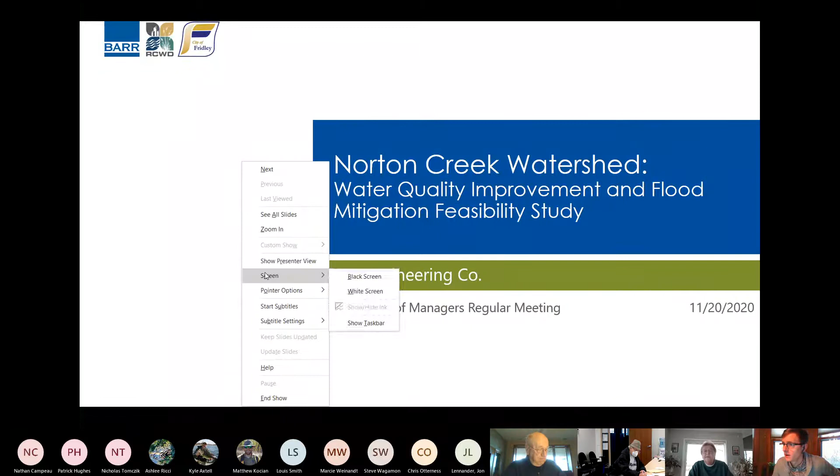Again, just to reintroduce myself, my name is Michael McKinney. I'm with Barr Engineering Company, and today I'm presenting the findings from the Norton Creek Watershed Feasibility Study. This was a study that we completed with the City of Fridley here in 2020. One of the main reasons we're presenting it here at the board meeting today is that this project was partially funded by a Rice Creek Watershed District grant that was awarded to the City of Fridley. So before I jump in, I just wanted to take a moment to say a big thank you to the Board of Managers and to Rice Creek Watershed District for taking interest in this project and for participation throughout, and for helping get this project complete.

With that, I'll see if I can turn on my laser pointer here. So Norton Creek Watershed is shown here on the figure to the left. You can see the watershed is nearly 1,000 acres, spanning portions of the city of Fridley, the city of Spring Lake Park, and city of Mounds View. Norton Creek itself is located in the southwest portion of the sub-watershed.

This is the only open portion of the creek that remains. Just to provide some context, we've got Highway 65 along the west-hand side of the watershed, and we've got Old Central going through the center of the watershed area. Norton Creek kind of goes back into a storm sewer here. It goes underneath the Medtronic parking lot, if you're familiar with where that facility is, and then it dumps straight down here into Rice Creek and drains out from there.

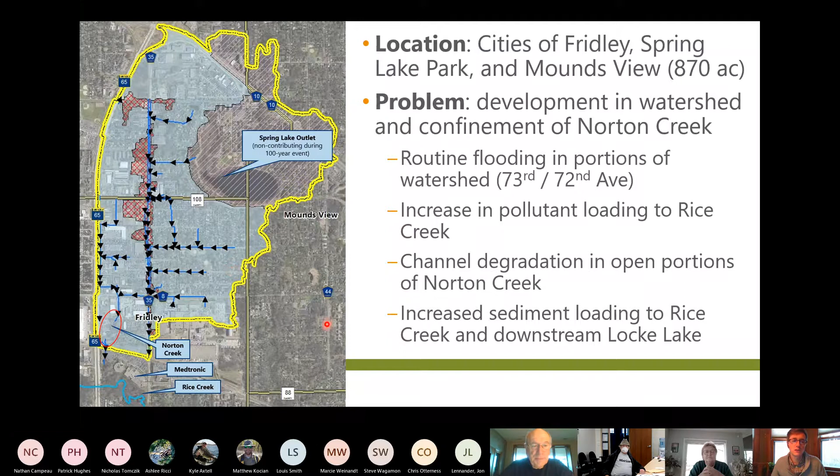So as you can imagine, with this amount of development and with confining the creek into a storm sewer system, we end up having a lot of flooding issues that occur, in particular along this former corridor of Norton Creek that we refer to throughout the report and this presentation as the focus area. That was one reason this area was initially of interest to the city of Fridley, to try and develop some flood mitigation opportunities for this area. But with this amount of development that's occurred, we're also generating higher runoff rates to the channel, which is causing channel degradation. And we're generating more suspended sediment loading and associated pollutant loading that's all getting discharged to Rice Creek. So this watershed is really of interest both from a flood mitigation and a water quality perspective.

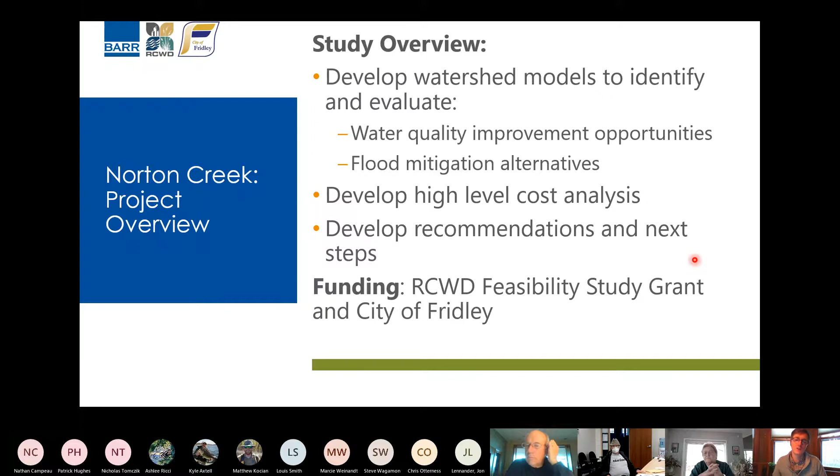So we've kind of got the overview for this study listed here. The major goal of this study was to develop models of the watershed to evaluate water quality improvement opportunities and flood mitigation alternatives within the watershed. We also developed high-level cost estimates for each one of those opportunities, and we developed a list of recommendations and next steps, both for the city and for partnering organizations such as Rice Creek Watershed District to consider.

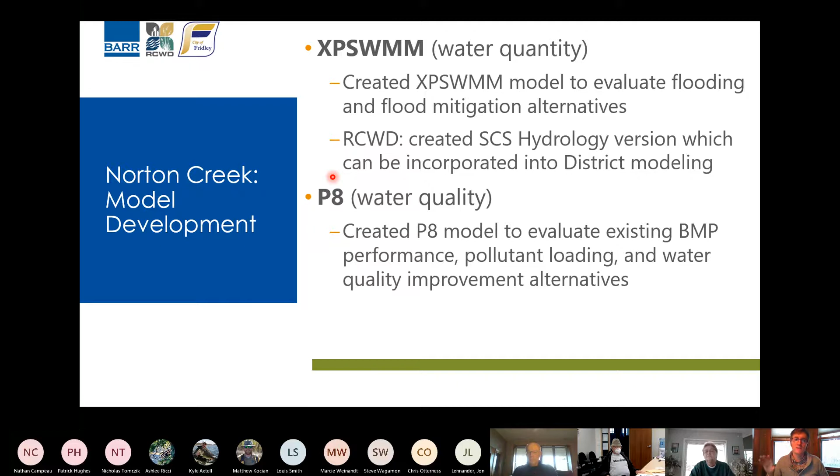We developed an XPSWMM model of the watershed area to evaluate flood mitigation opportunities, and we developed a P8 water quality model. These are just the names of different modeling programs to evaluate different water quality improvement opportunities. The main reason I bring this up is to point out that the XPSWMM model we created is a version directly compatible with the Rice Creek Watershed District Info SWIM model, so this highly detailed model can be copy and pasted directly into their district model.

As you can imagine, there is flooding that occurs in all portions of this 870-acre watershed area. But the most extreme flooding inundation impacts occur in what we're calling the focus area of this study, this corridor that was along the former, original Norton Creek corridor. When we originally shared these results with the city of Fridley, they were not terribly shocked, because they currently receive a lot of complaints and nuisance flooding issues from business owners and property owners in this area.

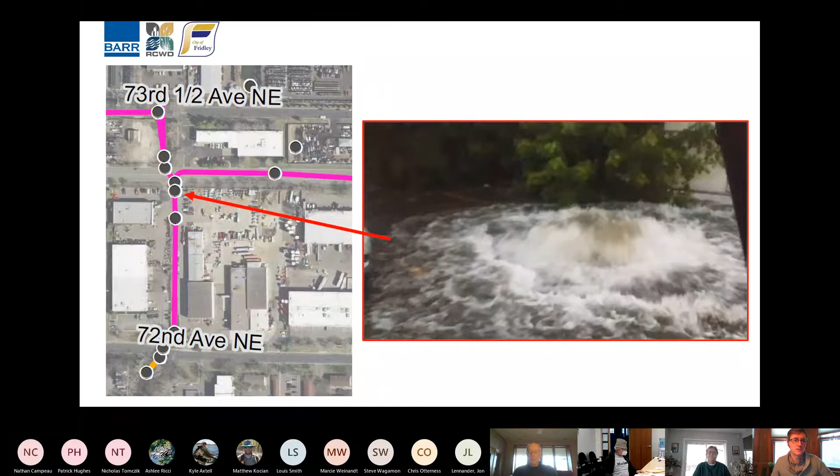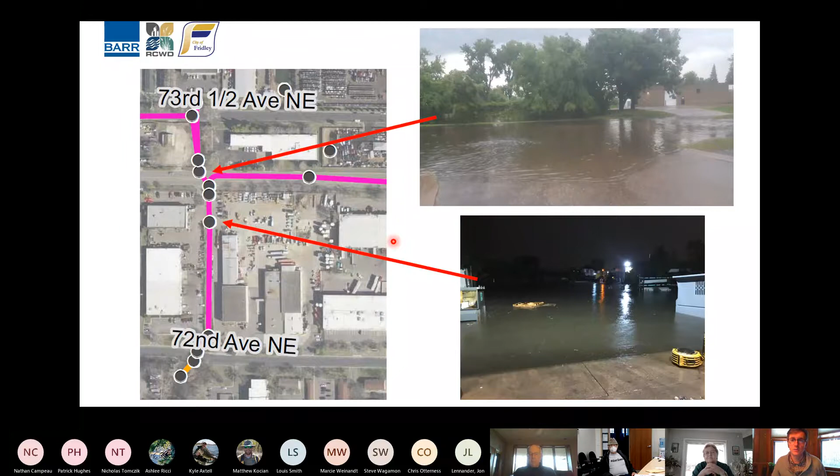So in addition to the XPSWMM modeling, we also developed a P8 water quality model of the entire watershed. The big goal of the water quality modeling effort was to determine how much sediment and pollutant loading is coming from the watershed, how much is removed in existing BMPs—we have existing wet ponds and existing infiltration basins throughout the watershed—and, really importantly, how much is actually discharging ultimately to Rice Creek.

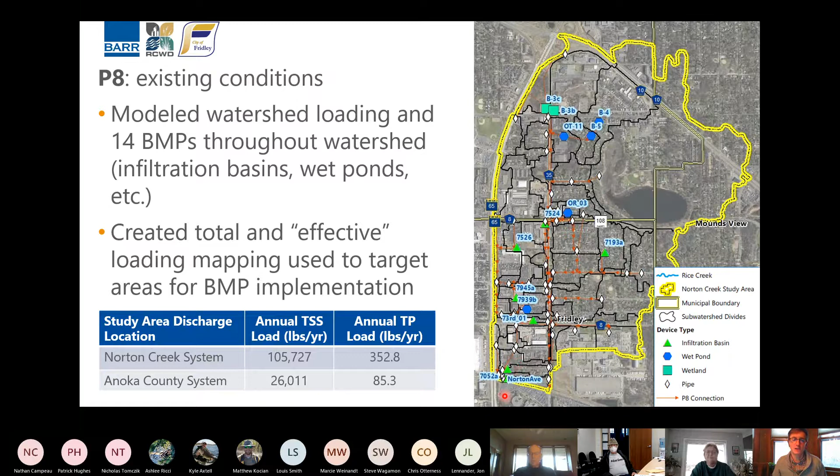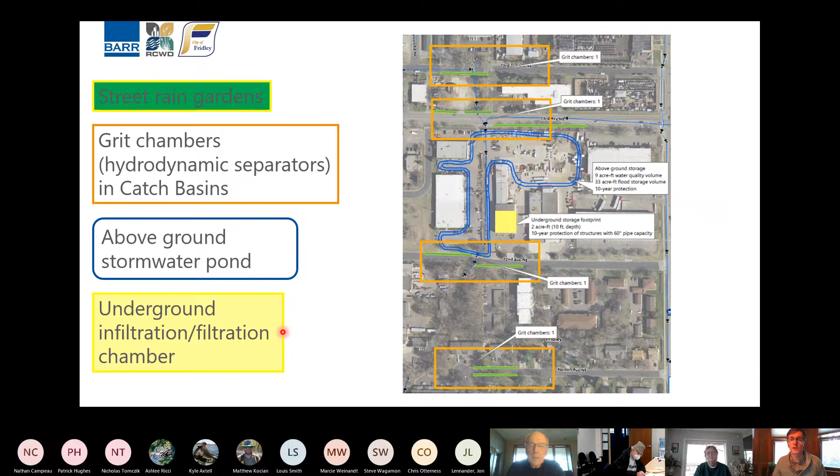We evaluated several different types of water quality improvement opportunities, ranging from green street alternatives—putting bump outs in the roads and small bioretention cells along the street corridor—to hydrodynamic separators at catch basins throughout the watershed. We also evaluated the intrinsic water quality benefit of BMPs originally looked at for flood mitigation, things like above ground storage and below ground storage, such as underground filtration and infiltration vaults. I'll have to fly through a lot of these results.

The report outlines a lot of these results in a high level of detail to provide the city and partner organizations with a lot of context for which water quality improvement opportunities and flood mitigation opportunities are more and less attractive from a cost benefit perspective.

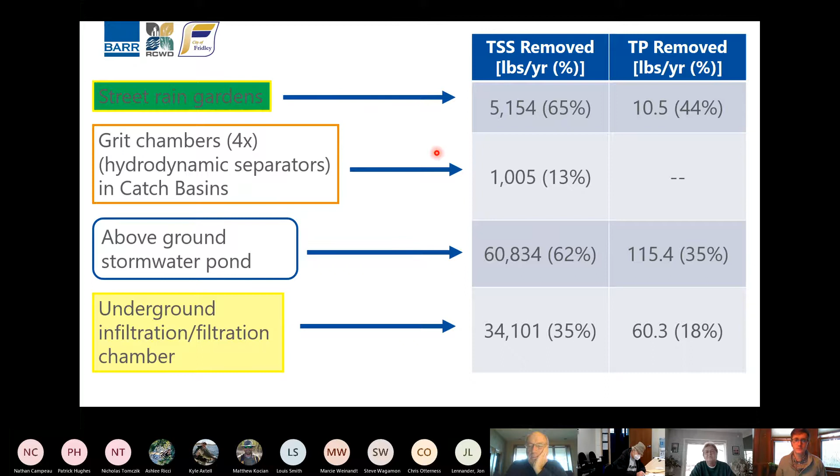But we did provide sizing recommendations for many different types of BMPs within the watershed, and also calculated pollutant load reduction values for each one of those BMPs. We then developed cost estimates for each of these different types of water quality BMPs, as well as calculated some metrics for cost-benefit analysis, including the cost to remove one pound of TSS and the cost to remove one pound of total phosphorus.

These sorts of numbers can be reviewed and compared to do that cost-benefit analysis, to help the city and partner organizations figure out which of these opportunities are more and less attractive.

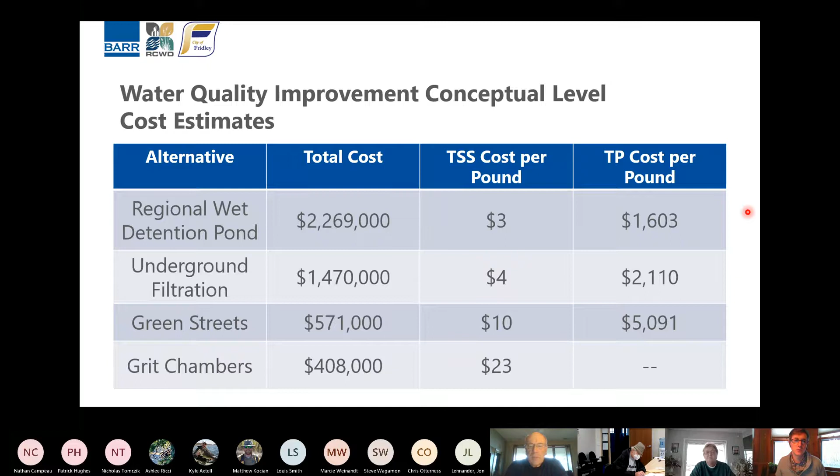Jumping straight into flood mitigation strategies, we developed a number of different flood mitigation strategies, mostly focused on what we're calling the focus area of Norton Creek, providing different levels of protection. So when I say provide a 100-year level of protection, that basically means our design goal was to protect all structures within that focus area up to the 100-year rainfall event. We also looked at strategies to provide lower levels of protection, protecting structures up to the 50-year event or up to the 10-year design event.

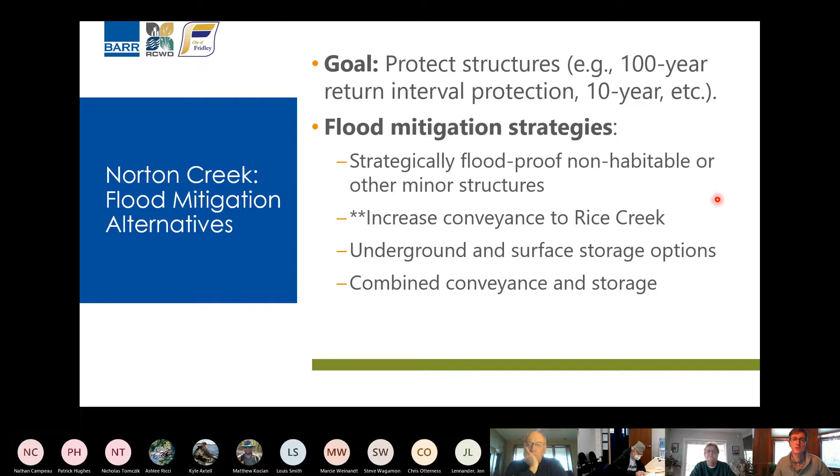We looked at a number of different flood mitigation strategies, which I'll talk about on the next slides. Often when thinking about flood mitigation, the easiest thing to first consider is increasing outflow conveyance from a watershed. Basically this means putting in larger storm sewer diameters, putting in dual storm sewer systems, to move that stored volume out of the flooding area more quickly, with the goal of protecting structures.

A lot of times these conveyance options can be very attractive because they're a lot cheaper than other flood mitigation alternatives to implement. But the downside is that in a way you're moving the problem somewhere else—you're taking that inundated volume and moving it to Rice Creek more quickly. This can lead to higher runoff rates in Rice Creek, potentially leading to channel degradation and downstream flooding impacts. And these conveyance options can be very difficult from a permitting perspective, sometimes even a non-starter.

But in the context of a feasibility study, it's really important to evaluate these sorts of options to bookend the cost-benefit analysis, because increasing conveyance is often the easiest and cheapest way of providing flood mitigation.

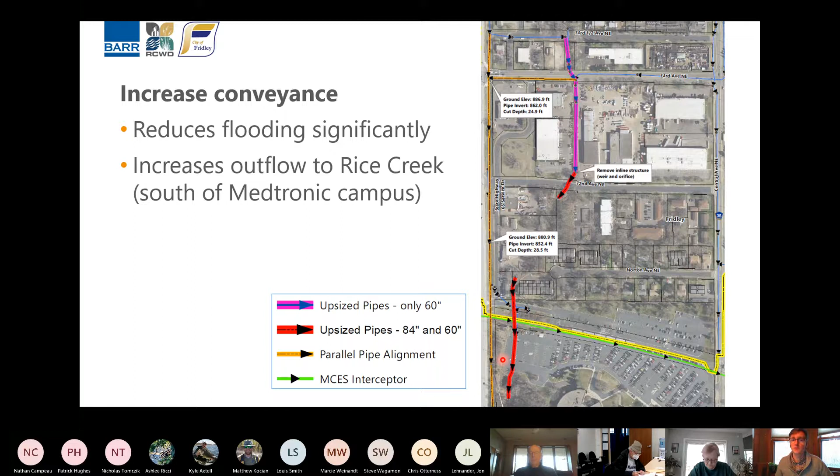In addition to increasing conveyance, we also looked at opportunities to provide additional storage within the watershed—looking for opportunities to store runoff volume in either above-ground or below-ground storage locations, again with the goal of protecting structures. We looked at various different configurations of above-ground and below-ground storage to provide different levels of protection, and we also looked at combinations of alternatives.

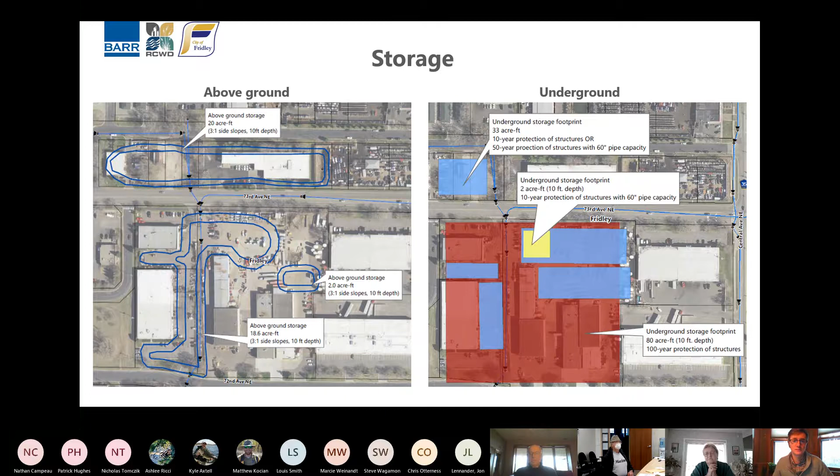What I mean there is we would review some level of conveyance increase combined with some level of underground and above-ground storage, to provide a suite of different alternatives, all with different cost-benefit analyses. We're not going to be able to digest too many of these numbers here, but just to give an idea of what's actually contained in the report.

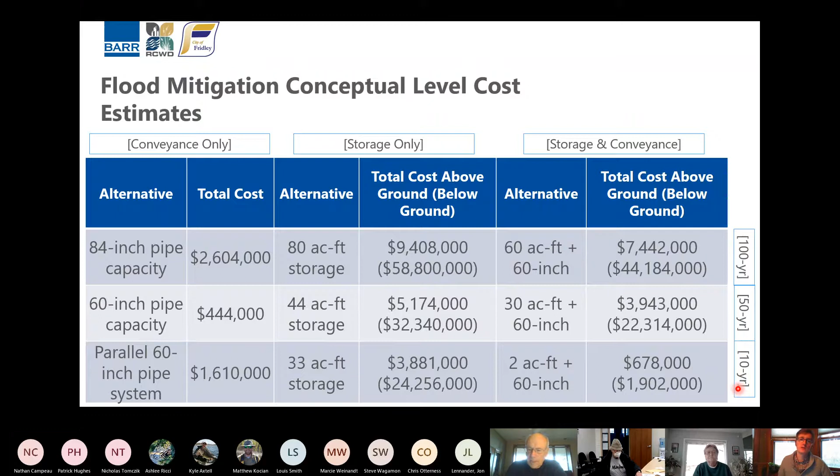We developed cost estimates for conveyance-only alternatives, where we're just increasing storm sewer conveyance. We also developed cost estimates for storage-only alternatives, providing flood mitigation through above-ground and below-ground storage, and combination alternatives where we provide both storage and increased conveyance for different levels of protection—from a 100-year level of protection down to a 10-year level of protection. This gives the whole picture of different strategies for providing flood mitigation in this area.

Long story short, it's very difficult to provide a 100-year level of protection, especially within the focus area of this watershed. It's likely more feasible to set a design goal of providing a 10-year level of protection, which quite frankly is often the actual goal when designing storm sewer, with the understanding that providing 100-year protection to structures can be very difficult when the 100-year event is a 7.5-inch rainfall event.

Another takeaway is that it is costly to provide flood mitigation without increasing conveyance rate to Rice Creek. Appreciating there are concerns with increasing outflow rate to Rice Creek, when you break down the cost-benefit analysis, it's important to keep conveyance alternatives on the table and consider those impacts through a more detailed HEC-RAS analysis, or putting these model results into the creek to see what impacts you might have downstream.

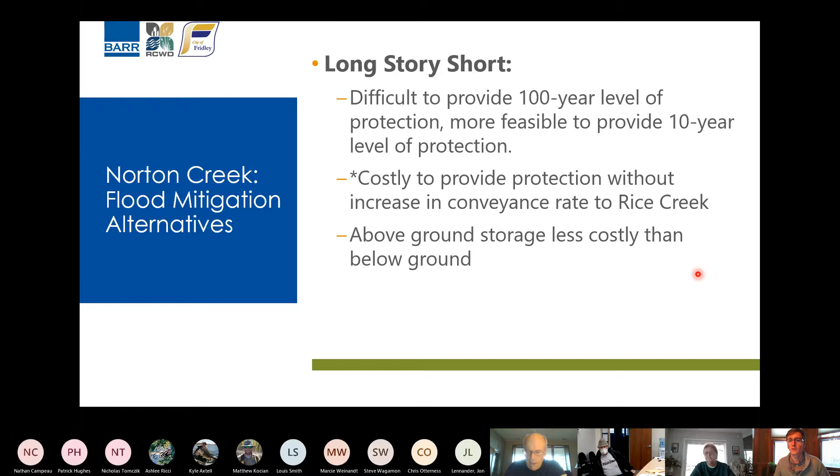Another takeaway is that above-ground storage is much less costly than below-ground storage, which isn't a surprise to anyone. But as we saw from the aerial imagery in this area, there's not a lot of room to provide above-ground storage right now. So these above-ground storage alternatives are something to keep in mind as development in this area changes. As properties go under development, redevelopment, or reconstruction, there might be opportunities to work with developers to provide some of this above-ground storage, with the alternative being providing it below ground, which is significantly more expensive.

The deliverables for this feasibility study were the report, the models, and the recommendations. A brief synopsis of the recommendations is included on these slides.

Again, a takeaway is that it is difficult to achieve flood mitigation goals without increasing conveyance rates to Rice Creek. It is recommended that the design goal for flood mitigation be the 10-year level of protection rather than the 100-year level. We recommend, whenever possible, pursuing BMP alternatives that provide both water quality benefit and flood mitigation, to get that dual benefit.

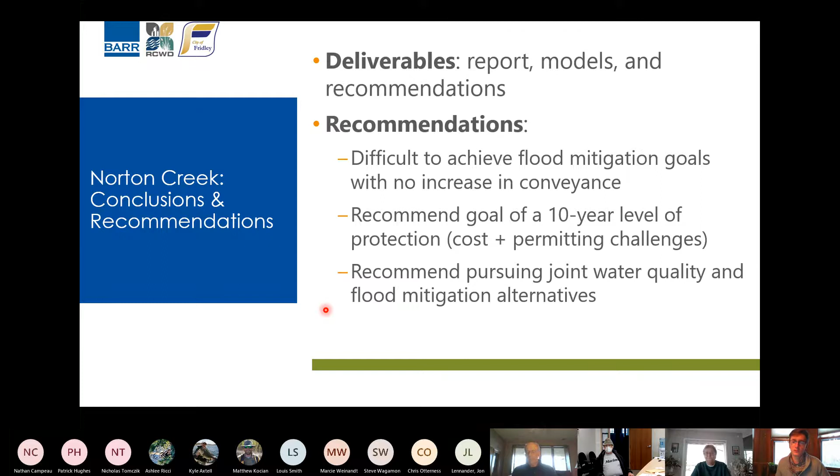We recommend that the city coordinate with partner organizations to evaluate the different alternatives presented in this study and determine which ones are more or less attractive from a cost-benefit perspective.

We had some additional recommendations related to validating the model, by going out and surveying low entry elevations to better understand when these structures really become impacted, potentially performing a monitoring study to evaluate the hydrologic and hydraulic assumptions within the study area, and continuing to monitor development, redevelopment, and road reconstruction projects within the study area, because timing water quality and flood mitigation opportunities with a road reconstruction project or major development is often a lot easier.

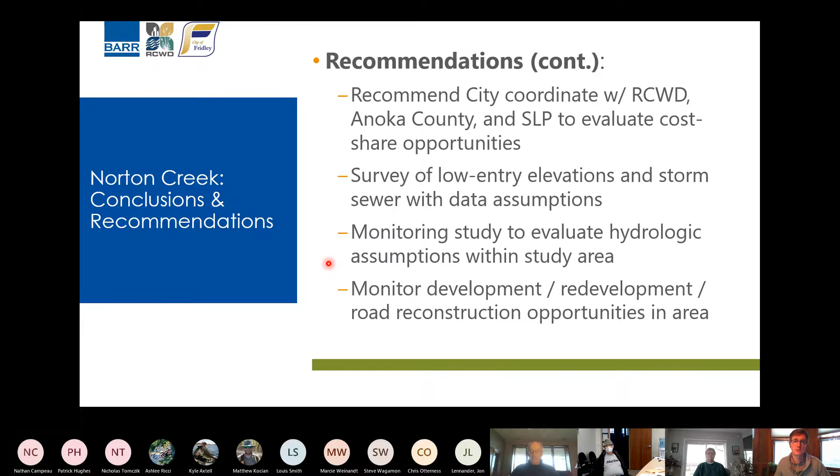I'm sorry I had to fly through that presentation; we were trying to keep it somewhere between 10 to 15 minutes. If you have any questions at this time, please feel free to ask.

Any questions from the board? Comments? Good morning, Michael. This is Manager Weinandt.

As the sunny day this weekend would have it, I went to look at the work we did on Lower Rice Creek and ended up in that parking lot you were talking about. I think it's probably on the watershed map you showed, large enough to see.

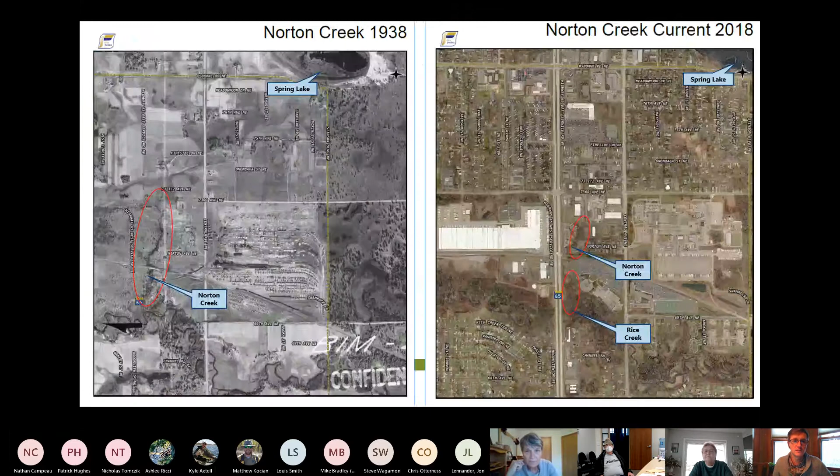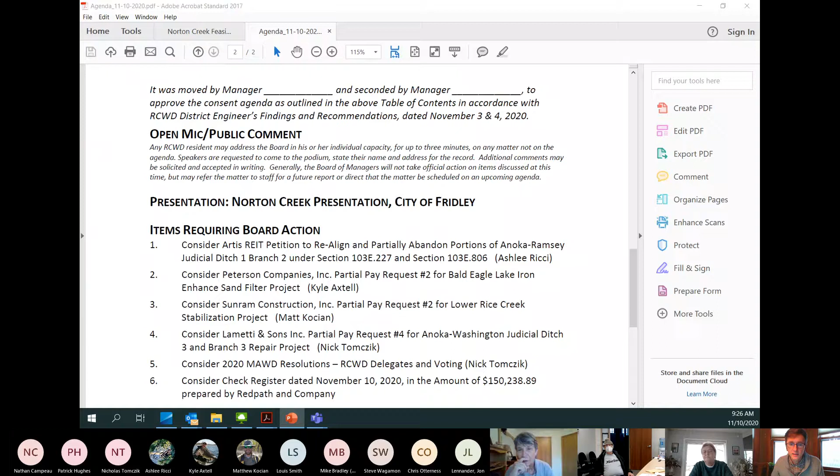Sure, yeah, I can go back and enlarge it, let's see if I can do that. I probably have a zoom in here. Unfortunately, we don't show the parking lot here. You know, I wonder, I actually have an ArcMap open of this area, I wonder if I can quickly get to that. So I'm understanding that...

All of the water from the Norton Creek watershed is entering Rice Creek at that point right in there, okay? Yep. And there's open ditch and then storm sewer. Is that exactly under all that industrial park area? Yes. Okay, I can give a quick run-through of this whole system here.

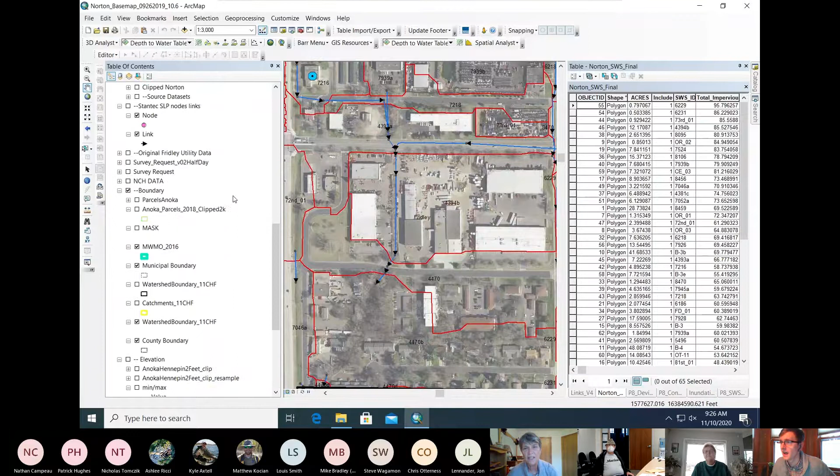It's kind of interesting, so this area, if you can make it just a little bigger, or just do the map. Oh sure, are you able to see the map I have pulled up now, or are you still seeing my presentation? I'm seeing the map, I'm also seeing all the details on it. Oh, like the lines, I can get rid of some of this stuff here, let's see if we can make this a little smaller. So I can maybe even turn off the watersheds here.

So as you can see, this portion of the creek used to be an open channel, again looking at that sort of 1938 map.

At some point, development in this area confined the creek to an actual pipe system. There's a large 72-inch storage pipe that goes underneath this property here, which is then constricted back down into a 48-inch pipe system right through here. I think the 72-inch vault was put in here more to provide some temporary attenuation and storage underneath this area, but it does get truncated back down to a 48-inch pipe system, where it then discharges into an open channel.

So this is an open channel that flows down to here, where it then re-enters a storm sewer system, and it gets a little complicated down here. There's a branching system, and ultimately it gets constricted to a 60-inch pipe system underneath the Medtronic parking lot.

If you've been out here in this area, in 2019 you might have seen there was a massive pipe failure underneath this parking lot — joint separation, basically a sinkhole that formed in this portion of the parking lot. They actually replaced that pipe system with an in-kind 60-inch pipe system, so this remains a 60-inch pipe through here, and then it discharges to the bottom of Norton Creek, which is basically just a ravine that goes straight down into Rice Creek.

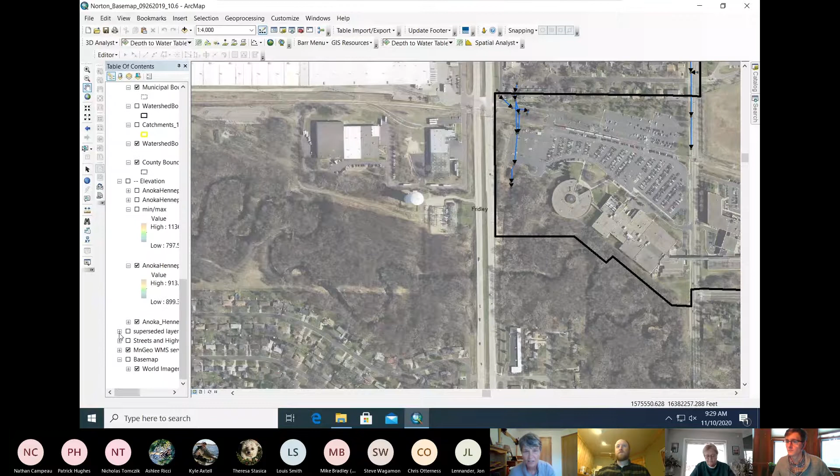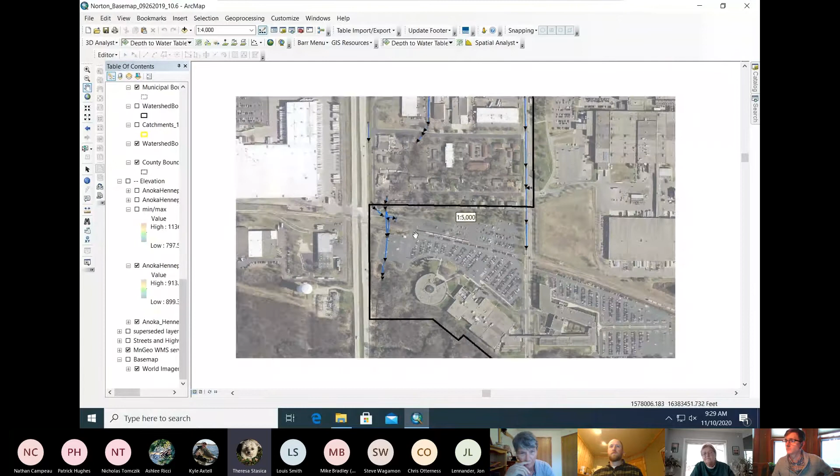Okay, and then based on our conversation yesterday, who's responsible for the repair and conditioning of the storm sewer — is that responsibility... Are you talking about the work in the Medtronic parking lot? Well, I'm asking throughout the whole system, because we had conversations yesterday about who's responsible for those closed systems.

I guess I'd ask Chris that one. Go ahead, Nick. So here there is no public drainage system in existence, which was the focus of our conversation yesterday. This is a combination of city storm sewer, which would be the catchments on the road and such, and then that pipe system as it moves underground, periodically daylighting.

But in situations, and this is where maybe the Fridley folks would join in, with Medtronic — if the landowner there wanted to cover up the natural feature of the daylighted creek and put it in a pipe, it would, in my mind, make them likely the responsible party for the fix.

Okay, so this is not public drainage system, but a combination of public storm sewer and then probably augmented with, I'll call it, private crossings or private storm sewer system. Maybe John from Fridley, do I have that correct?

I believe I do, yes, and that is correct. I can't speak to when the storm sewer was put in on the Medtronic property — I was not here, so I don't know the exact details of that. But we have a drainage and utility easement over that storm sewer, and when it failed, it was Medtronic that came in and did the repairs. They actually realigned the pipe slightly and did a few other things, and we got new easements for it. But it is essentially their pipe, and they're responsible for it. Okay, thank you.

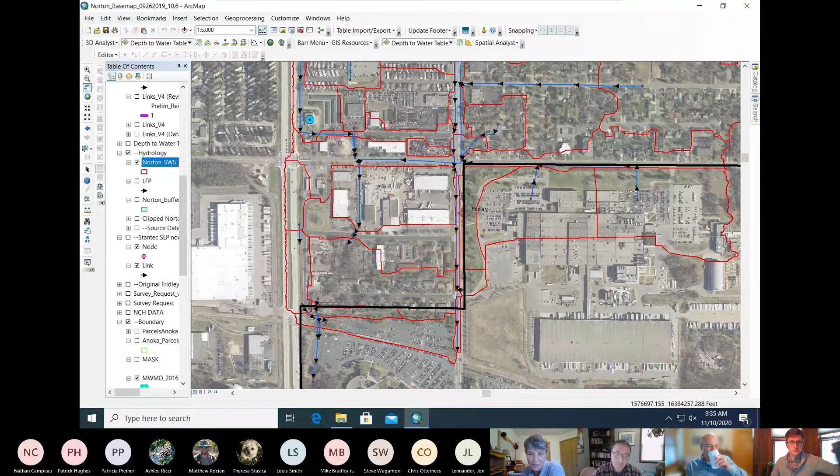So it's not so forgotten anymore. Kyle, I think you should also give some credit to the great work of the Citizens Advisory Committee, because as I recall, that group took a serious look at this, because it was being able to prioritize the multiple applications that came before them. So thank those groups.

Any further comments on the presentation or questions?

So this is Bradley. I'm thinking Matt Kocian must be having a heart attack listening to this. I support, obviously being the Captain Obvious, the importance to us of protecting the investment we've already made on those repairs downstream from them.

President Preiner, may I jump in? Yes, certainly, go ahead. Yep, thank you, Manager Bradley, for the segue there. Did you see me on the edge of my seat? I just waited to say something.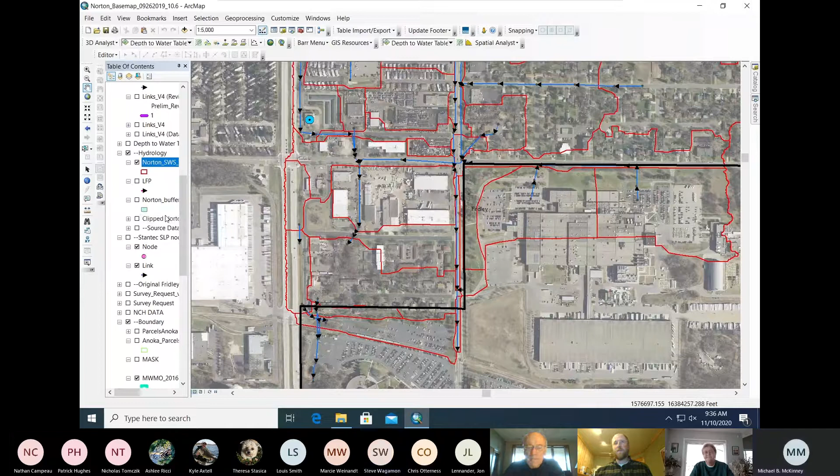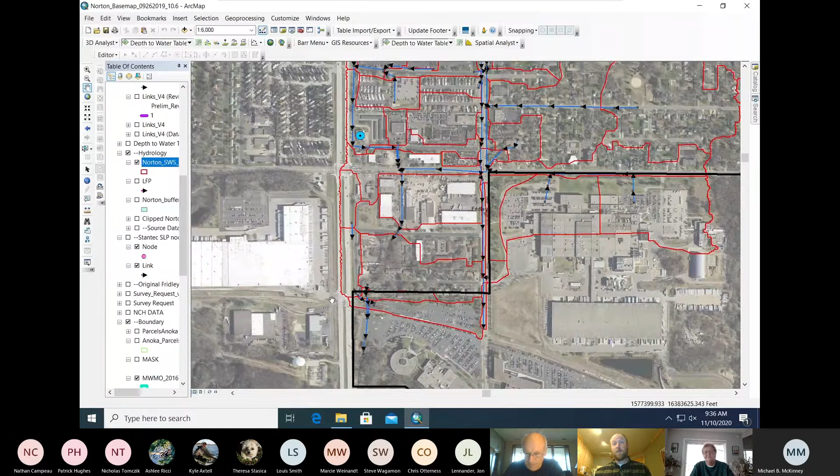I'm really glad I'm at this board meeting so that I could see this, because there is a great tie-in with the Lower Rice Creek work that's currently being wrapped up by Barr and by the city of Fridley, who've been great partners on that project. So as Manager Weinandt pointed out, the Lower Rice Creek Stabilization Project is just downstream of this, where this sub-watershed enters. You can see it on kind of the left side of that map there.

There it is, yep. So I guess the main note that I wanted to make, and Michael, great presentation, I think this is really great work. And I certainly appreciate how it's costly and difficult to provide flood mitigation without increasing conveyance rates here. It's a fully built out watershed, older infrastructure. You've got pipes that are throttling from large pipes down to small pipes that are causing those flooding problems.

So I recognize that and respect that. But there are other costs that the district would incur, that the city of Fridley would incur, Anoka County Parks downstream, by further increasing conveyance rates here. So we know that the primary driver of the erosion in Lower Rice Creek is these high flow rates, and that erosion is sending more sediment down to Locke Lake, the Mississippi River.

So there is a cost associated with that. And just one other kind of an aside, I guess, Michael, when you talked about above ground versus below ground storage and breaking out those costs, were you looking at long-term costs of pond maintenance and things like that too? Yes, there was operation and maintenance annualized and calculated back into that total upfront capital cost.

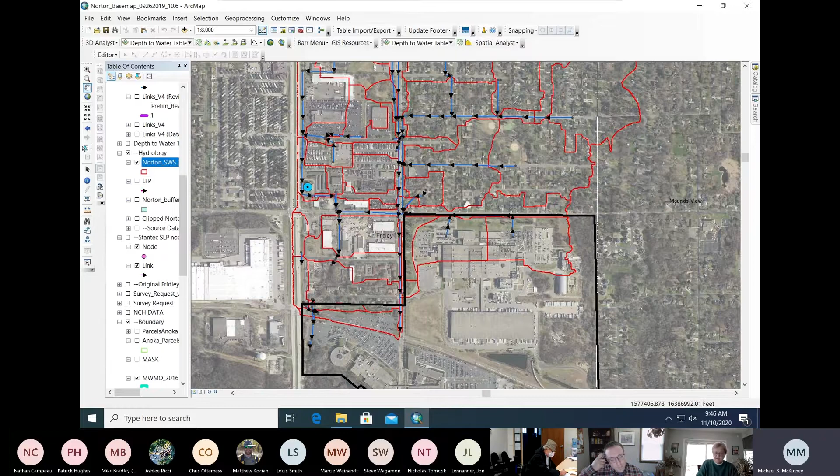Thank you. Good morning, Madam President, Board of Managers. For you we have Resolution 2020-24 for appointing the engineer, Houston Engineering, to review a partial realignment and conversion of Anoka Ramsey Judicial Ditch 1, Branch 2 in Blaine. We are recommending that you move forward and appoint Houston to evaluate the petition.